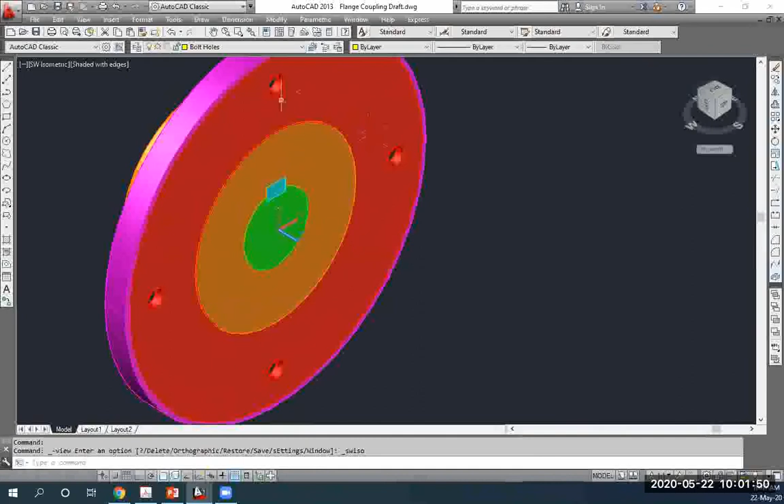First things first, just recapping. So the last thing I said was regarding the bolt PCD, which means the bolt pitch circle diameter. If I refer to my drawing again, a pitch circle diameter would mean if I draw a circle, the circumference of that circle should pass through all the 4 centers of these bolt holes you see here. So that's the pitch circle diameter.

Now that is based on your estimation. So now you have completed all the analysis, you know the dimensions for the key, you know the dimensions for the hub, and you also know the dimensions of the web, in terms of the web thickness, how thick or thin it is. But in terms of its diameter, that is based on your estimation.

Are you getting me when I say the web diameter? What would be the web inside diameter? The web is whatever you are able to see in red. Maybe I'll just turn off the others. So looking at it, the inside diameter of this web here is equal to the outside diameter of the hub. And now for the outside diameter of the web, that is entirely up to you.

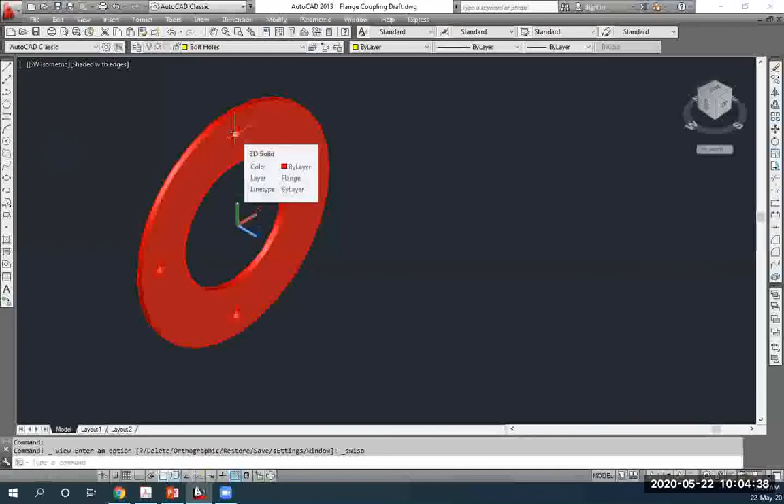Now PCD would mean the diameter of - if I measure the length across from one end to the other end, which is basically the PCD. When I say one end, it means the one end of the bolt center to the other opposite end of the bolt center. That would be obviously the PCD. So that's the pitch circle diameter.

So you can choose any value less than the outside web diameter. I hope that wasn't too confusing. So that's what you will do first - determine the PCD for bolts. So in this case, what you guys are determining is the number of bolts used in this case.

After that, the formula is the same. Everywhere in all our analysis, we are using torque, starting off with the torque. So torque is equal to - this time it uses shear force. So you have a flange coupling, you have two of these and they are held in place together with bolts. One side is connected to the motor, the other side is connected to the gearbox.

So what happens is, as soon as the system starts to operate, because both of the flanges are held with bolts, if your design is not proper, the bolts would shear off or break off. So that's why shear force is used in this case.

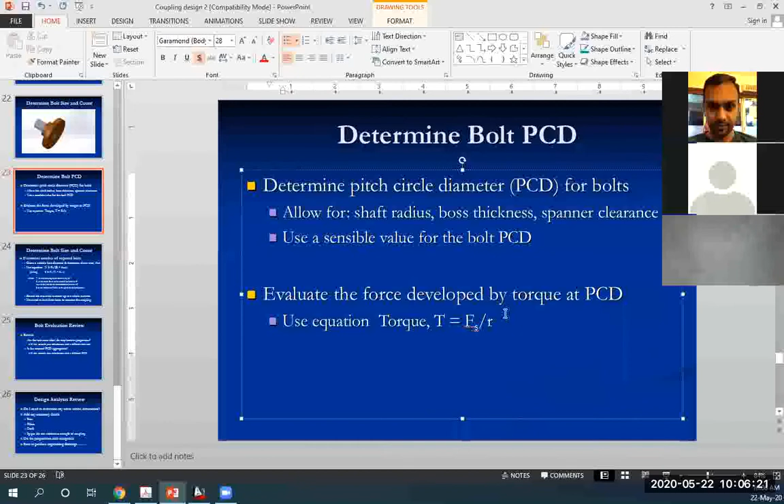So therefore torque is equal to Fs divided by R. Now what would be R in this case? Any guesses? The PCD radius. Exactly, it will be essentially half of the PCD. So now you make the shear force subject of the formula. You know the value for the torque, and you know the PCD you have chosen, specifically to all your assignment problems.

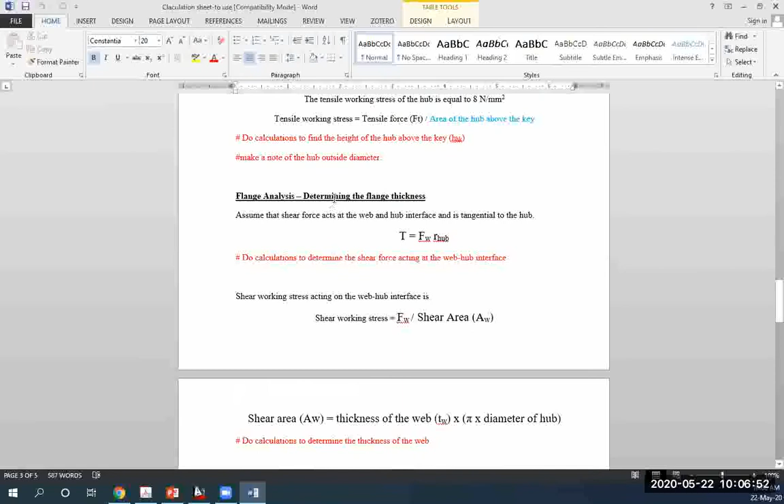So find the shear force. After you find the shear force, I'm not noting anything down here because on the calculation sheet, everything is pretty much similar to the other analysis. Maybe I'll just control C. Bolt analysis.

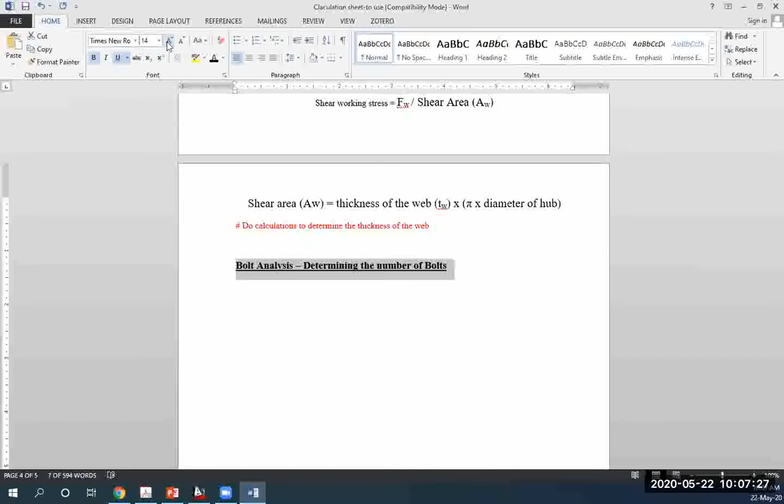Okay, so this is the next step which you guys will be doing, and this is what we are going over at the moment. So now what happens, it says determine the number of required bolts.

Okay, so your formula is still the same. This is the TS, the bolt working shear stress. Okay, and in this case, it's given in Newton per meter squared.

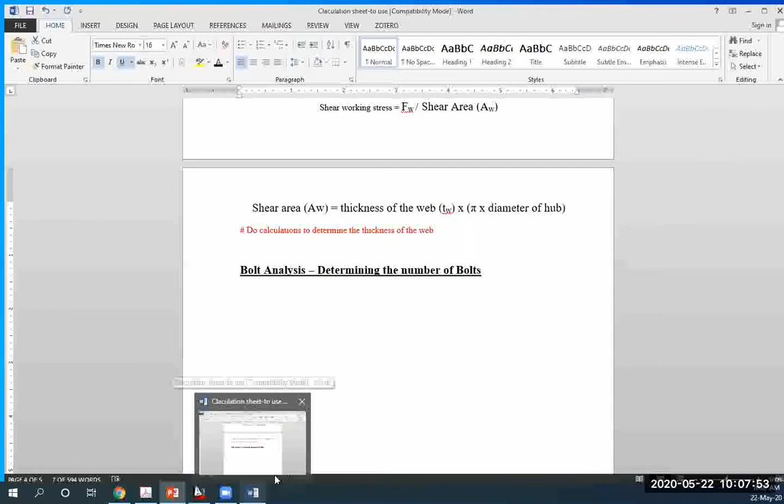So there was a question on one of the discussion forums about the dimensions. So be consistent with the dimensions, right? So here we have listed down all the details regarding the bolts.

So since we said the bolt would shear off if not designed properly, you could use the shear working stress value, whatever value is given here. And I did tell you in the very first class how do you find these two values. If you're unsure, please refer to the videos.

Okay, so you'll use the shear working stress value, input it in here. And you know, just from your previous calculation, you know the shear force. B here means the number of bolts in the pitch circle bolt pattern.

Multiply by area of bolt. AB is the area of the bolt. How would you find the cross-section area of a bolt? Or how would you find a bolt is a cylindrical object, assuming for simplicity's sake? So for a cylindrical object, how would you be able to find the cross-section area?

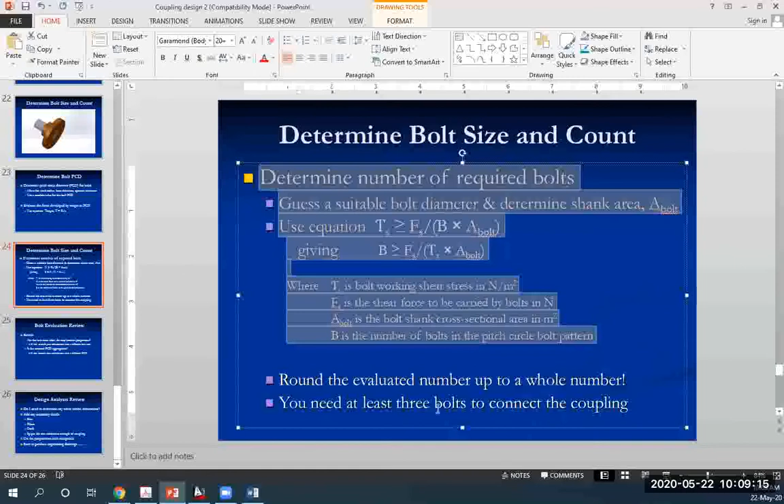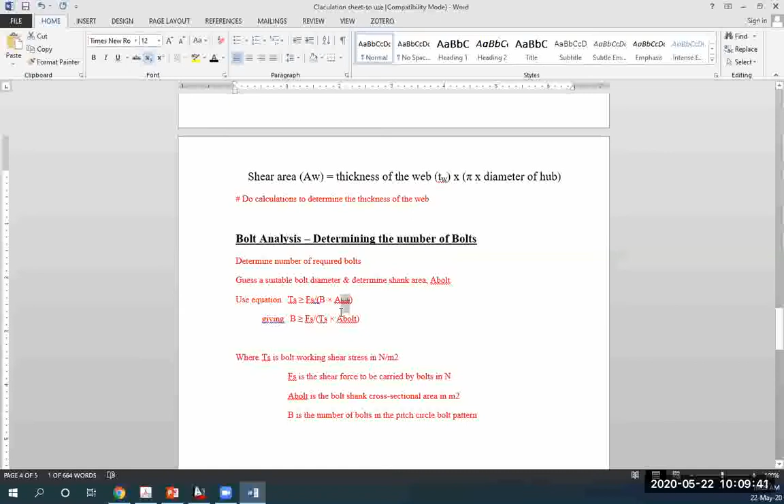Yes, anyone? Any suggestions? So is it area is equal to 2 pi r height plus 2 pi r squared? Plus, um...

Not really. Okay. So if you... Control C. Sandeep, yes.

The cross section of the cylinder would obviously show a circle. So would you use pi r squared? No. Yep, exactly, right? Yes, that's very much correct. Right. So cross section of a cylinder, A represents a circle.

So you find the area of a circle. Area of a circle is equal to, sorry, the symbol is pi r squared, isn't it? Yeah.

Now this r here, what do you think this r would be? What does it represent? This r would mean what? It is equal to the radius of the bolt, right?

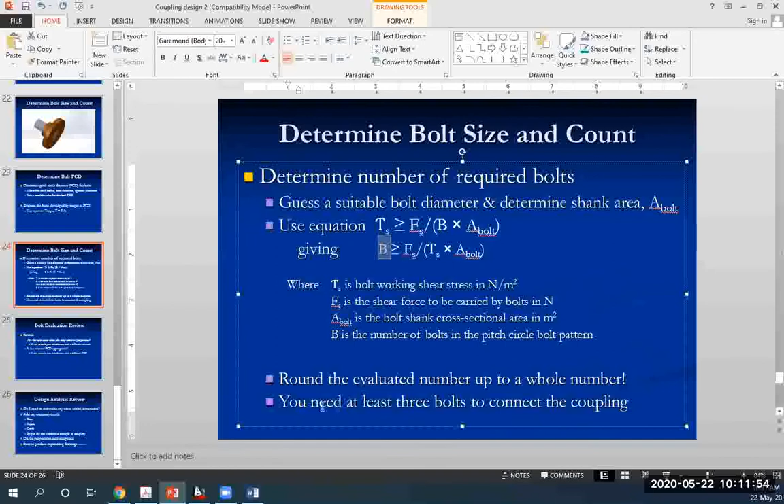And then it says here to review. So you know that area is equal to pi r squared. That r in that area is equal to the radius of the bolt, that you'll have to assume. So if you get a value for B which doesn't look okay, you'll have to go back again and change the value of the radius of the bolt and then do your calculation once more.

So what happens going from this equation to the one below it, you're making the number of bolt the subject of the formula. The shear force you know from your previous equation divided by the shear working stress for the bolt you are given in your assignment question, multiply by the area of the bolt. Area is pi multiply by r squared, R is the radius of the bolt.

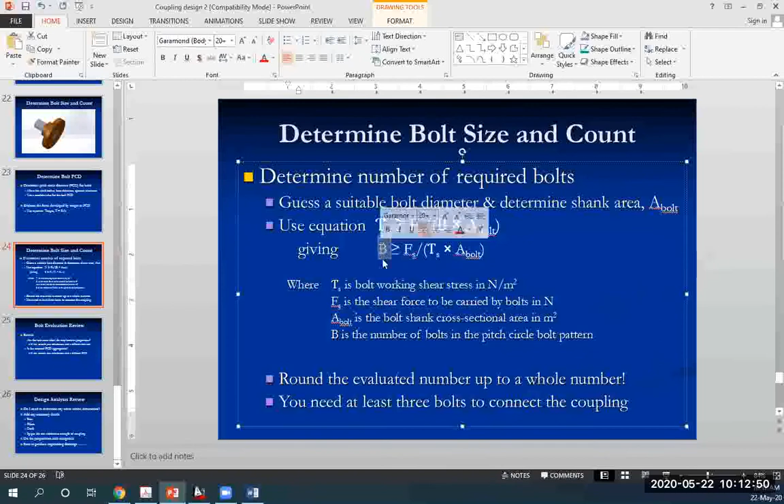So the only variable for you to solve will be B, number of bolts. Okay, so just by looking at this drawing, pretty much in my case, I have assumed 4 bolts. So the value for B is equal to 4, right? So if I get a number, if I do my calculations and I get a value for B as 3.4, I'll obviously round it up to the next whole number. So in my case, it's 4.

So now, is that good enough? Was that easy for you to understand? So I've just pretty much copied everything from the notes and written it down here, so making your work easier, just determine the number of bolts.

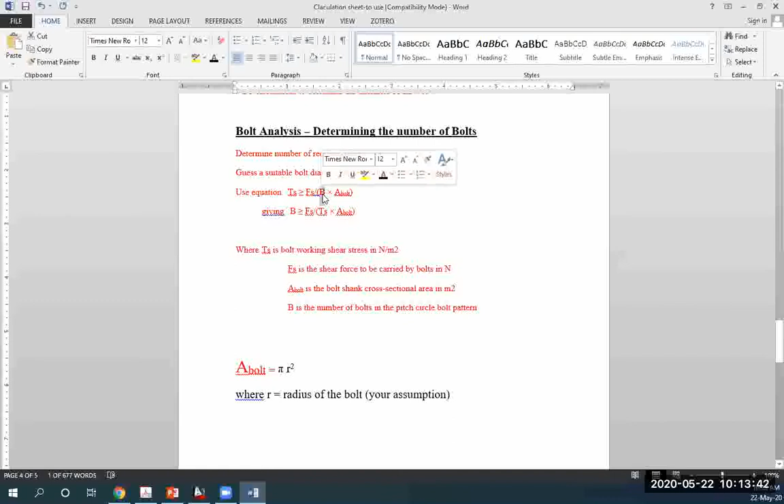Okay, you could also work your way the other way in the terms that you know B, which is the number of bolts. Let's say you use B as 4, and then you make R the subject of the formula. Then you find the radius of the bolt. In other words, you're determining the size of the bolt. Any questions?

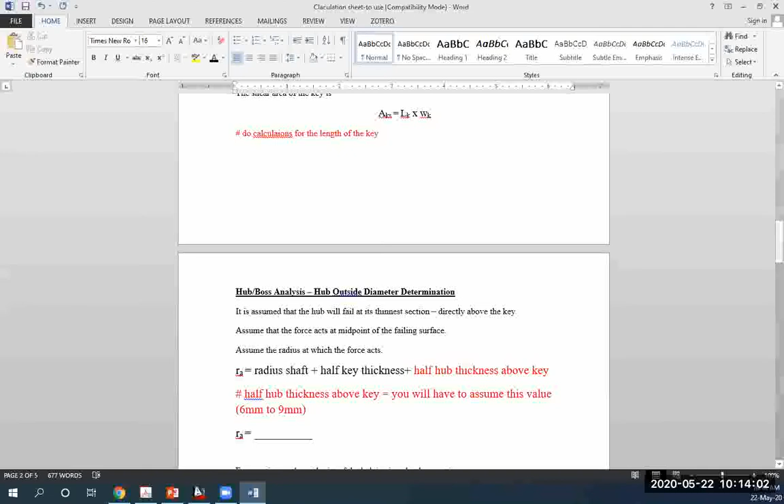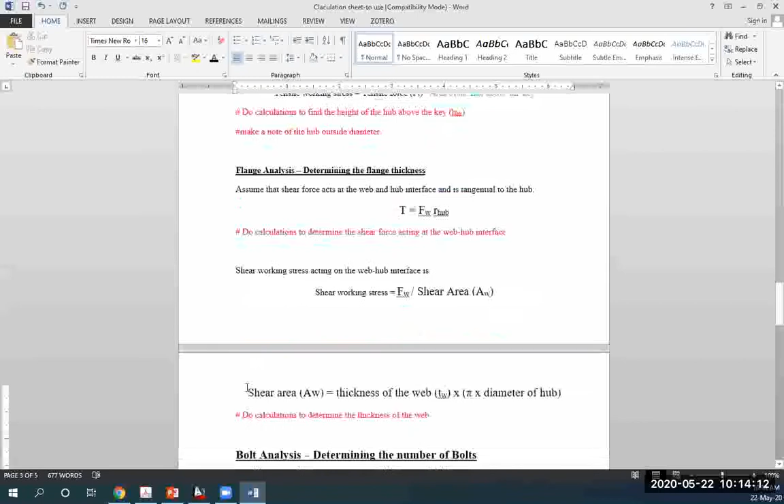Is there any limitation to the number of bolts, or is it based on your calculation? You mean the value for B? Yeah, is there any limitation, like in standard form?

Not really, but it should be something which looks practical, right? So if you have one bolt, that's not practical. Even two bolts would put a lot of stress on the bolt, keeping in mind how fast the shafts are rotating and subsequently how fast this whole flange coupling will rotate. So 3 is okay, 4 is also okay, 5 would also be okay.

But you don't just write that B is equal to 4, you have to show your calculations. How did you get to 4? It's just very basic calculations, nothing hard. There are only 2 places for the bolt analysis where you are making assumptions. The first is determining the PCD.

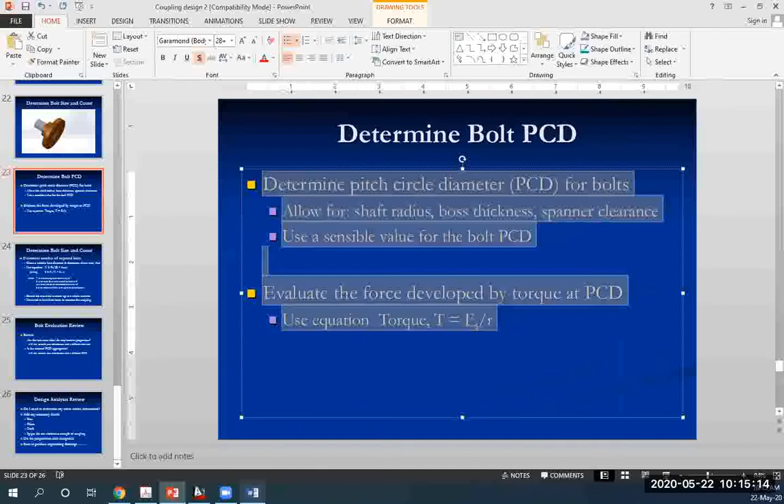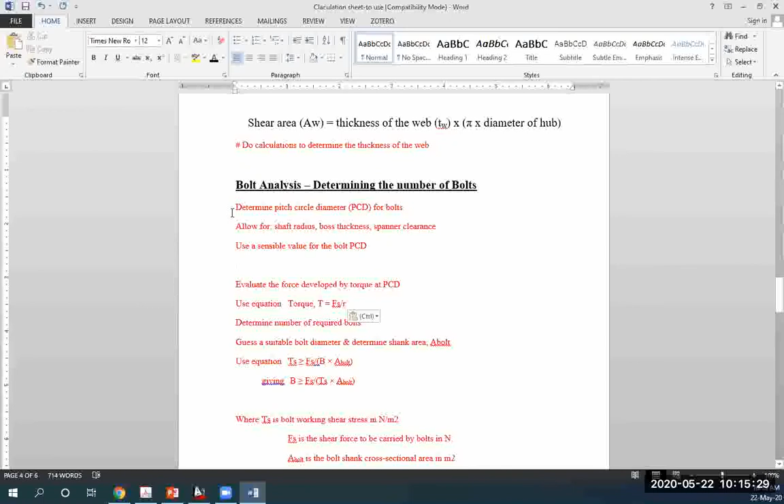I should probably put this down here, so that none of you guys get confused. All right, there you go. And whenever I put a hashtag, that means that is what you're required to do, in terms of calculations.

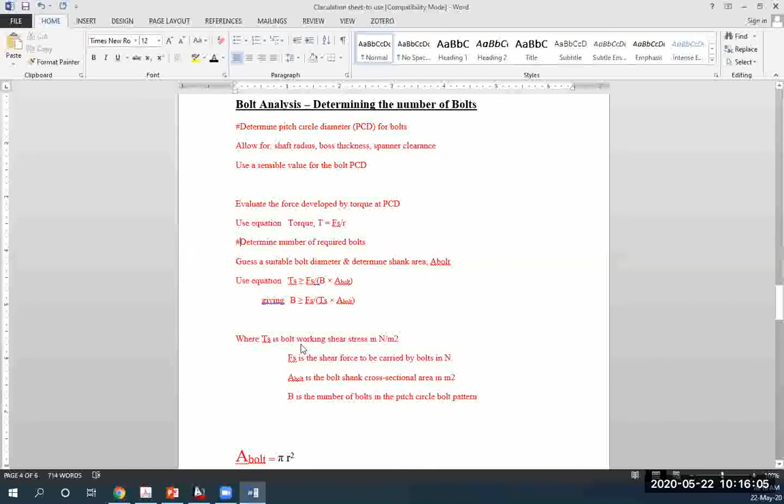Who was that who asked me the question? Was it me? No, let's see, am I able to get your name? Was it Joel? Yes, okay. So does that answer your question? Yeah, okay, thank you. So there are 15, excluding me, there are 14 of you.

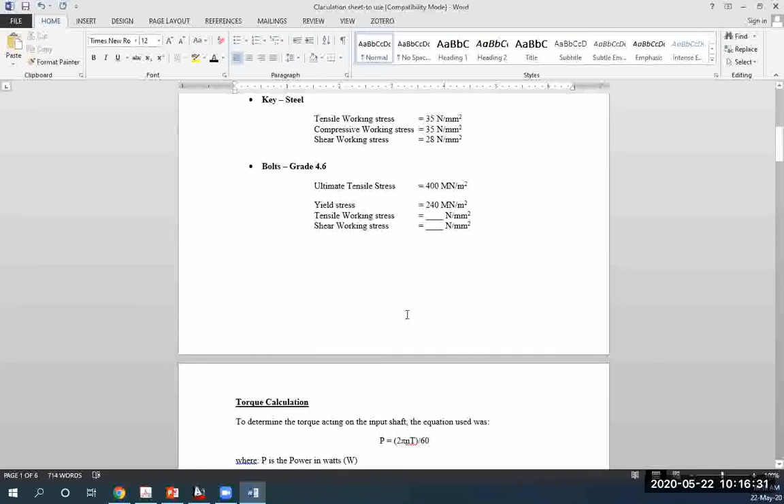Okay, so start from the beginning. I'll give you time before I discuss about what drawings you need to do. I hope you have started with your calculations. So if you have any questions, now is the time to ask. I'll give you the freedom to do that.

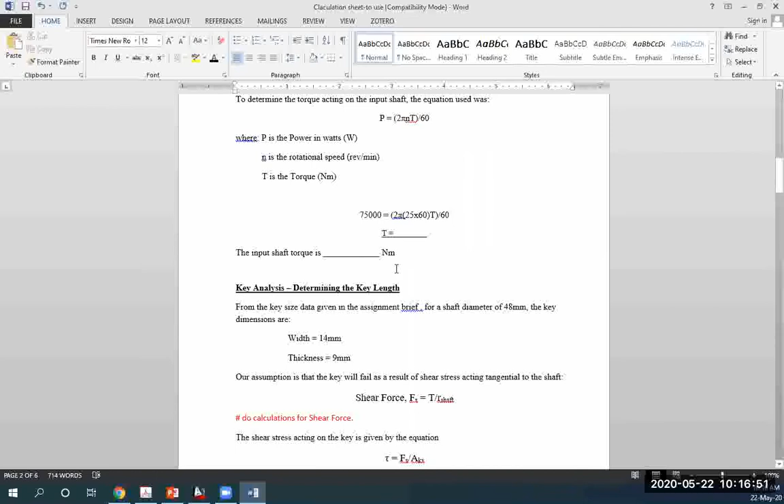So you do have the freedom to do that. We are not able to see any one of you. Feel free to unmute yourself and ask questions. This is the best time. If I'm not able to clarify, then obviously your other colleagues who are online would be able to provide you suggestions. So now you guys have the mic to speak.

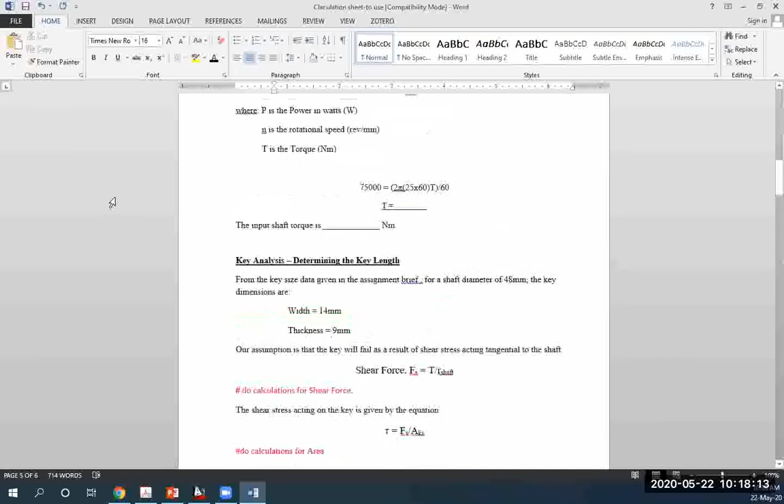So I'm not getting any questions from you guys, so my assumption is that all of you are on point with the calculations. Anyways, I'll just go over this once more. There are 2 parts to your assignment. The first part is design analysis, and the second part is drawing generation. You cannot go to part 2 without completing the analysis.

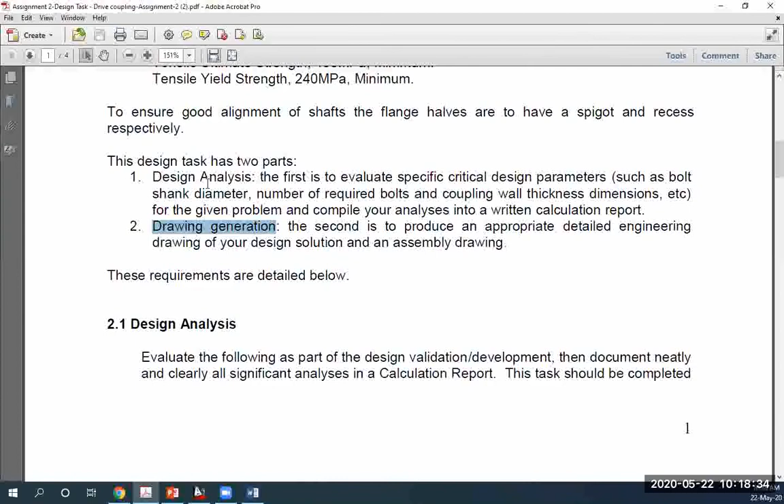The reason you need that is because through the analysis you would be able to—oh, there's a chat. Sir, could you go over the bolt analysis again? My Zoom wasn't able to connect. Okay, right, so once I finish, at the end I'll go over the bolt analysis again. So you can't do drawings without knowing the dimensions. That is important.

So let's see. When it comes to the design analysis, you are given a calculation sheet which has a standard view. It has the project title, the authors. I believe you're doing this in pairs, so write your name with your ID and your partner's ID and name. The date which you probably started with the assignment, not really important, and if you can include somewhere who is your tutor or teaching assistant.

So we are aware which session you belong to, but not really important at this stage. And the page—in my case I've used 4 pages, so this will be page 1 of 4, and the next one will be page 2 of 4.

So start with the overview. Again, this has to be in your own words. Overview is basically a summary of your entire calculation report. So if someone else picks up your report, he or she should be able to understand straight away what this report contains, what information is provided, and what information the author is trying to determine. Okay, so we are doing analysis, calculations together with assumptions for a flange, to design a flange coupling.

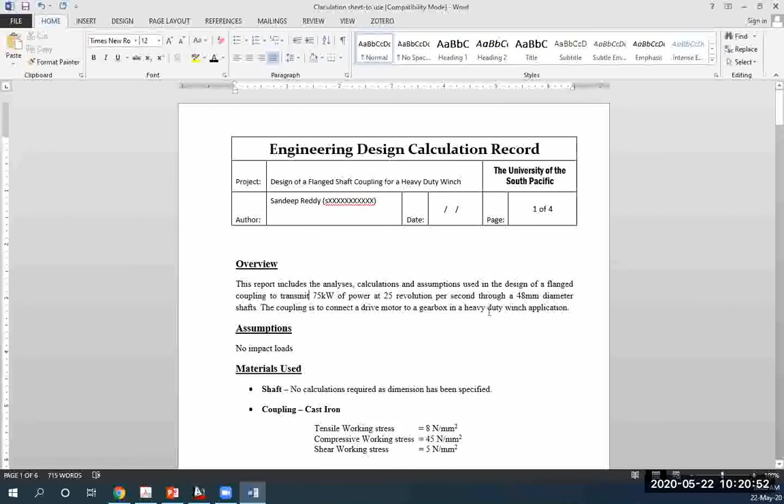And what is the purpose? The purpose is to transfer or transmit power from one shaft which is connected. You could make this more precise—I haven't said here that the power is transmitted from the motor to the gearbox. You could add this here as well, and the coupling is to connect it. Anyways, it says here a drive motor to a gearbox, so please go ahead and write this in your own words. Not hard at all.

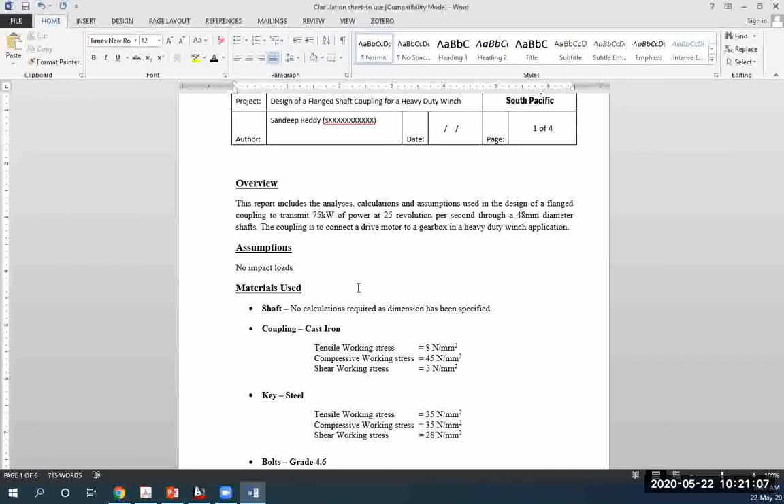Assumption: we are assuming that there are no impact loads. The only load acting on the system is due to the torque which is generated, which we'll come to later on. Materials used—really important. Just like in any textbook, you list down the knowns first, so that is what we are doing here. For the shaft, we are saying that there are no calculations required.

Okay, moving ahead, you could pretty much keep this the same. It will be pretty much the same for all of your reports.

Okay, for the coupling, it's made out of cast iron. So what is the tensile working stress?

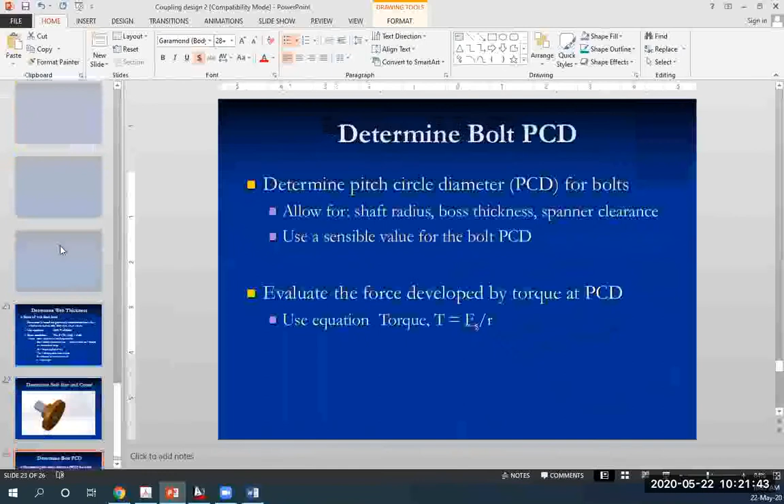Anyways, going back to your report, so you list down all the knowns. For the coupling, it's made out of cast iron. For the key, it wasn't specified, so please do note this, that the key is made out of steel. And for steel, you also have to note down its tensile, compressive, and shear stress. Why are we noting this down? Because we are using this later in our calculations.

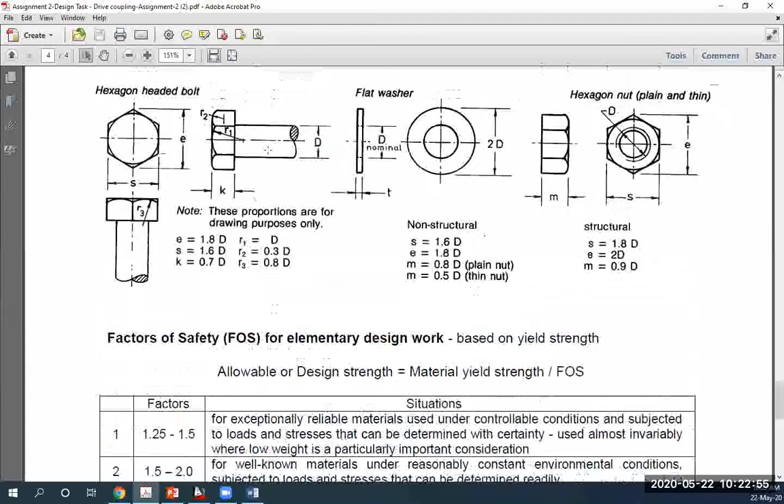And coming to the units, be consistent with your units, right? So it's 8, I have used, it says in your assignment, where is it? Here. So either you can use working stress in meganewton per meter squared or Newton per millimeter squared. So for cast iron, it's 8, so it's either 8 meganewton per meter squared. So you can always be consistent with your units, right?

And yes, all of you have learned to use SI units, so if you want, you could use that all the time.

So just a question, yeah, carry on. So will we be using the ultimate tensile stress and the yield stress of the bolts, which is given here in the analysis? No. No. Okay, no.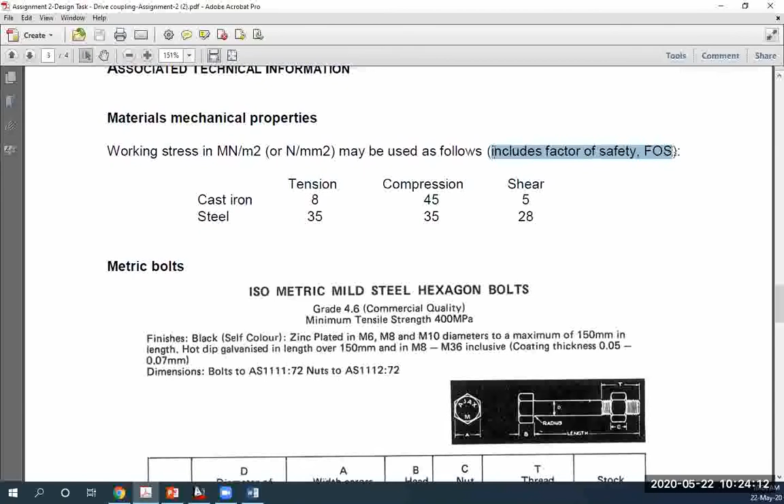The reason you will be not using it is because you would have noticed that in all our calculations we are using the working stresses. Reason being, because it says here, yes, because it includes the factor of safety, right? So meaning all the calculations which you are doing, and at the end, the values you will get, which you will use for your design in drawings, will include the factor of safety. So your factor of safety would be pretty much greater than 1 in this case. Okay, so you would say your design is safe, right?

Okay, and what else is there? So I've just made changes to this one. See, but don't be too confused about the units, so it ultimately determines the values you get, right?

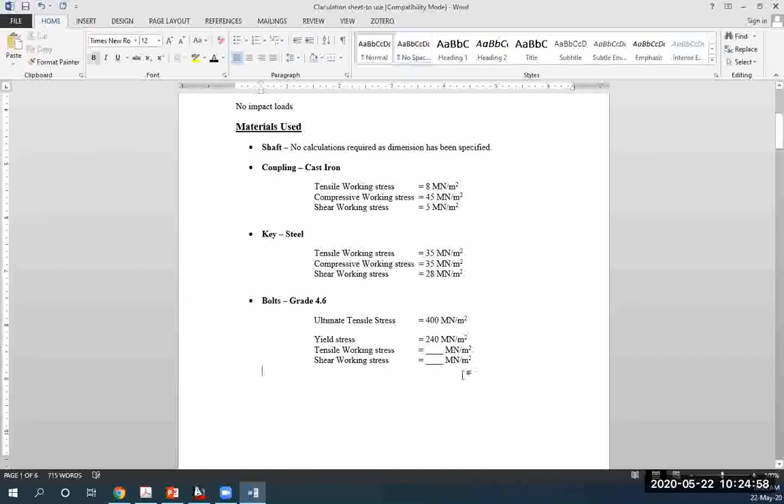So here we are, so after getting all that, it starts with the torque calculation. As for the torque calculation, you're given the power, this formula is provided to you in this PowerPoint slide: 2 pi nt over 60. So this is where the units come into play, right? Power, you convert it into its standard units, which is watts. So convert kilowatts into watts.

And I believe the rotational speed was given in revolutions per second, so convert it to revolutions per minute. And then once you use SI units, automatically the value for torque you will get will be given in Newton meters, right?

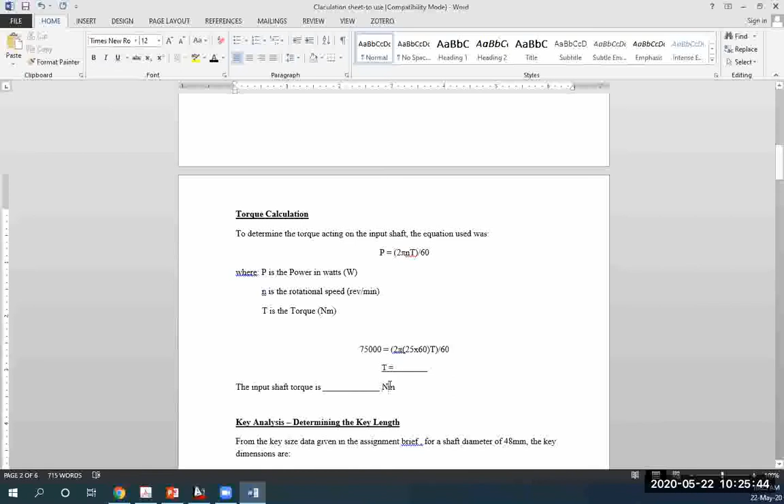So there you go, and after that, you start with the key analysis. So for the key analysis, you're given the width and the thickness. When I say given, it is given in the last page. So using the shaft diameter, we were able to determine the width and the thickness of the key, so you use that in your calculations. So the only thing you need to determine is the length of the key.

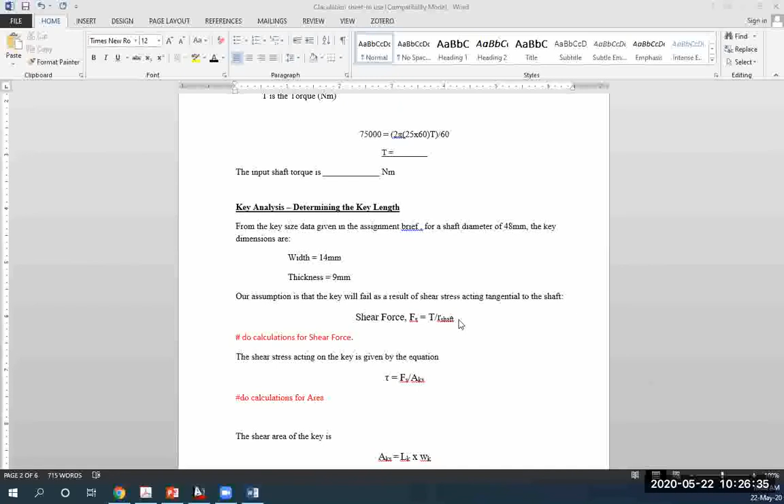So we assume that the key will fail in shear. So for torque, you are aware, and you use the radius of the shaft. So always torque is equal to force times distance. Distance means from the center to wherever that force is acting, to the point where that force is acting. So that's how we determine what R is for all our analysis.

And so the key is experiencing shear stress, so stress is equal to force over area. So the area part of the equation, you break it down into the length of the key, width of the key, and then you find the length of the key.

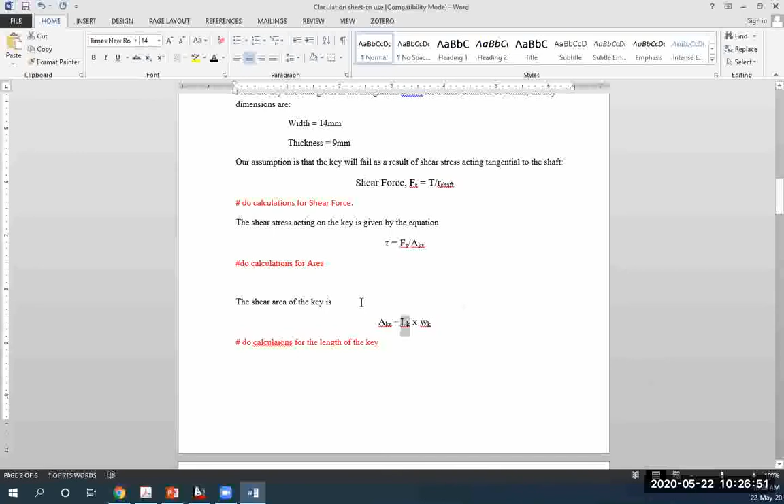Once that is done, we did the hub, okay, we'll call it the hub analysis, so not to confuse anyone. And similarly, for the hub, you have to determine at which point the hub breaks. That's why we did RA.

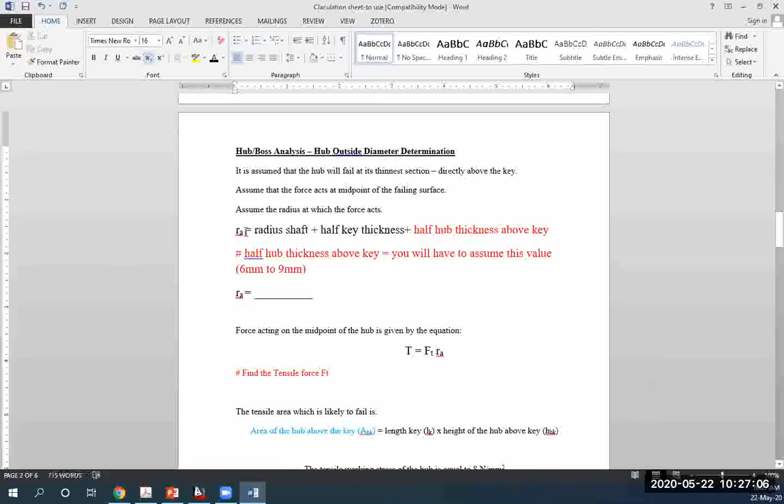RA means assumed radius, which is the radius of the shaft plus half the key thickness plus half of the hub thickness. This part I said you could assume anything between 6 mm to 9 mm. So that's your assumed radius.

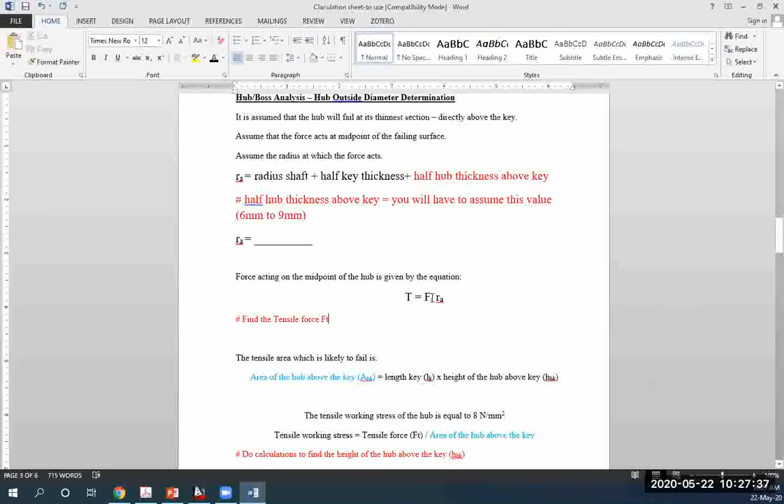So once again, torque comes into play. We are assuming that the hub will fail due to tensile force. That's why Ft. Use this equation to find Ft, the tensile force.

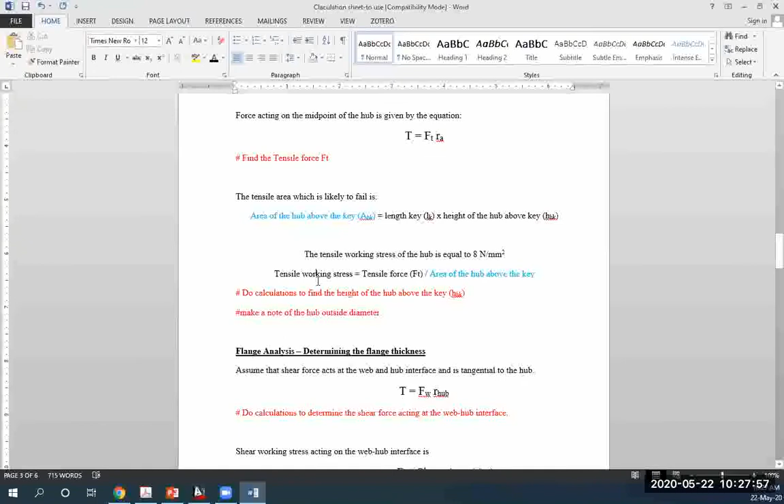So now the tensile working stress is equal to the tensile force divided by the area. Just in terms of units, to simplify things for you, let's say the tensile working stress I used is 8 meganewtons per meter squared. That's my units, assuming. So I'll input here 8 meganewtons per meter squared.

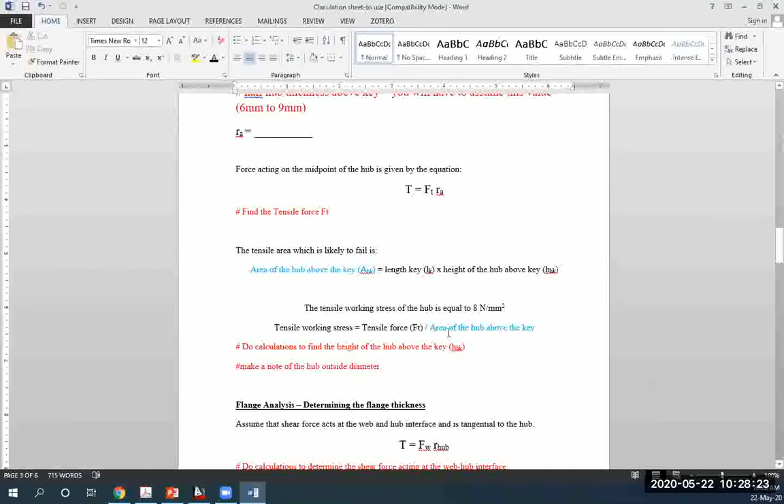So the tensile force will be given here in newtons, divided by the area. Now it is meganewtons per meter squared. Therefore, this area part, the values here which you use should also be in meters.

Let's say, for example, for the tensile working stress, you use 8 newtons per millimeter squared. So the tensile force will be in newtons, and the area part, the units would be millimeters. So that's about units, okay, how units affect your answer.

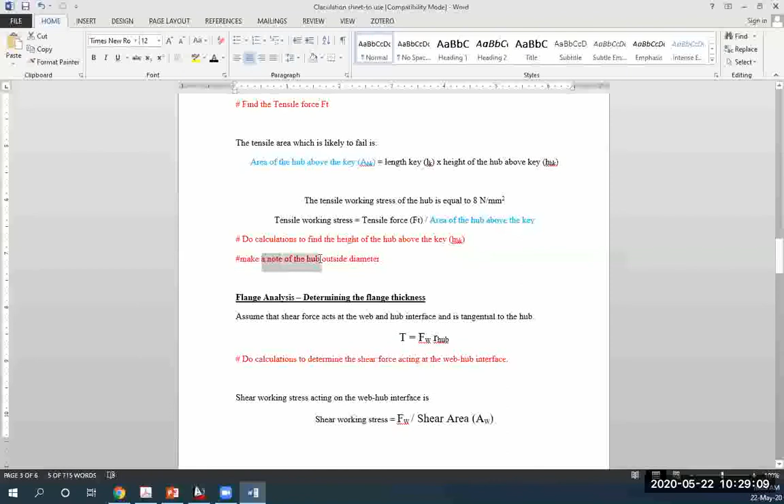So here, do calculations to find the height of the hub above the key. And make sure after you find that, add everything together and tell us what is the outside diameter of the hub. After that was the flange analysis.

I would probably put here web analysis. No, flange analysis, determining the web thickness. How thick is the web?

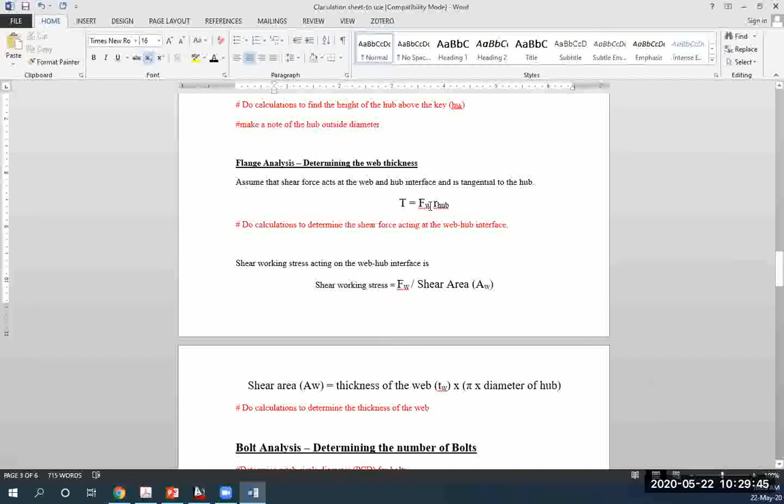So again, torque. We are assuming that the web will fail in shear. So wherever the flange interacts with the hub, that radius we are taking as the radius of the hub, right? The radius will always take it from the center of the shaft. The starting point is the center of the shaft. Do keep that in mind.

So you find Fw, which is the force acting on the web. Okay, we have limited time. What else is left? So again, shear working stress, which is acting on the web, and the web is made out of cast iron.

So the shear working stress here is 5 meganewtons per meter squared. Shear working stress is in meganewtons, so the force should also be in meganewtons, divided by the shear area, and area should be expressed accordingly. So when you have units which are consistent, you'll see that they cancel each other out.

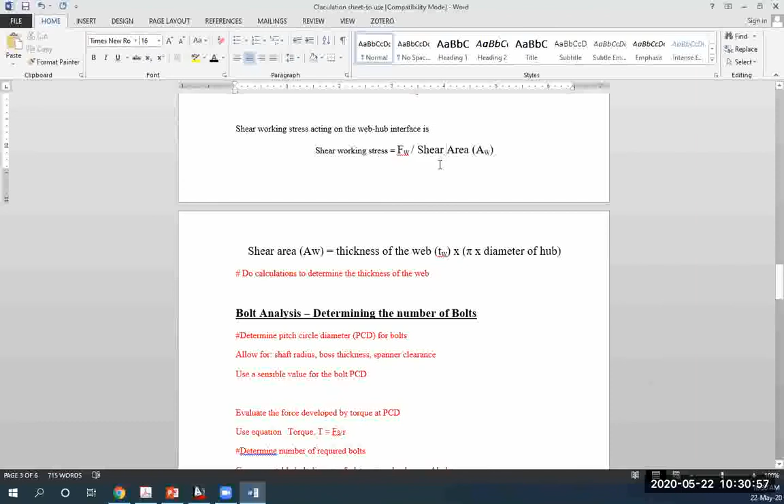So shear working stress, let's say you have expressed it in meganewtons per meter squared. So your FW has to be in meganewtons divided by meter squared. After that, the shear area is equal to as such, so the only variable left for you to determine is the thickness of the web, which is here, TW.

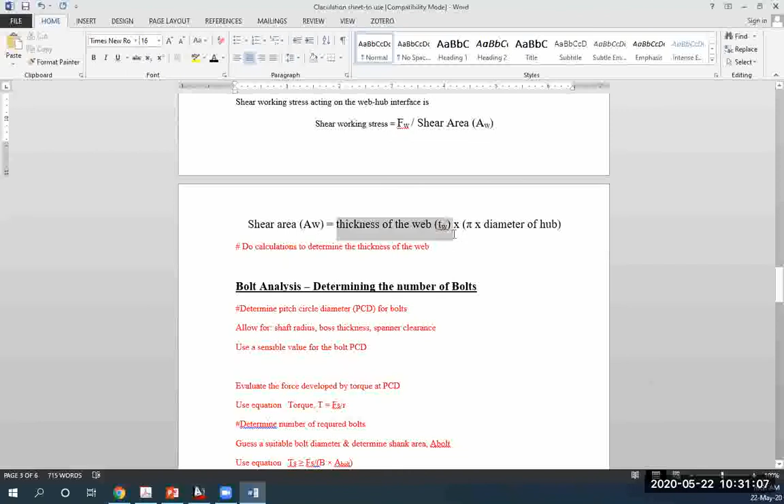And coming to the bolt analysis, you could work either way. Either you could determine the number of bolts, or you could determine the size of the bolt. If you're determining the number of the bolt, start with the torque first.

So torque is equal to the shear force times R, where R is half the pitch circle diameter. In other words, the starting point for that R is the center of the shaft, and the end point is the center of the bolt. So that's half the PCD.

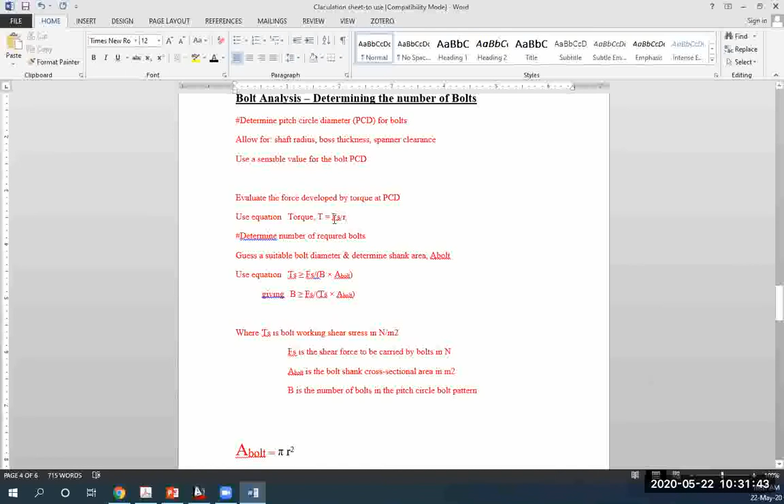So here you'll find the shear force acting on the bolt. Now TS is the shear stress acting on the bolt. So shear stress is equal to the shear force divided by the area. Always remember that stress is equal to force over area.

And in this case, what we are doing is we are multiplying the cross-section area of the bolt by the number of the bolt. So here it is where you can choose.

So if you know the number of bolts, you enter that value in place of B and find r, where r is the radius of the bolt. Or if you do know the radius of the bolt, then make B the subject of the formula, as is done here. So B is the subject of the formula.

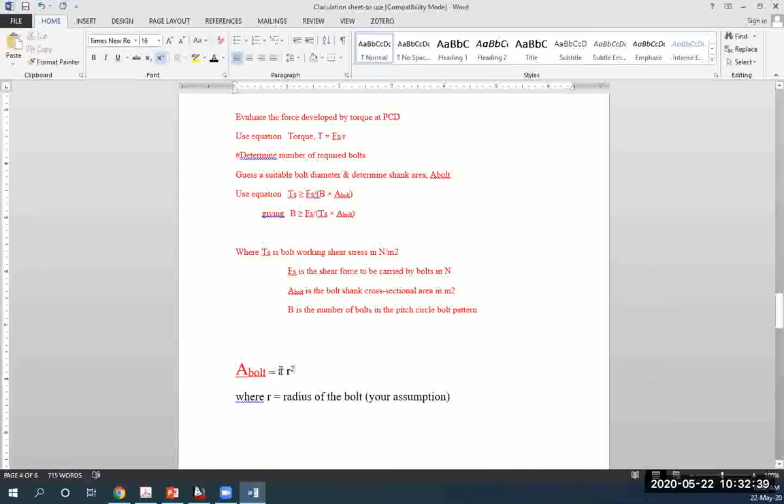Shear force, you know, TS is the shear stress acting on the bolt multiplied by the area of the bolt. And as I said, the area of the bolt is the cross section area, pi R squared, where R is the radius of each bolt. So that's your bolt analysis.

And so we will also be assuming the web outside diameter, which is 200 to 230 mm.

So in red in front of you is the web. The inside diameter of the web is equal to the hub diameter. The outside diameter of the web, you can assume any value between 200 to 230, 240, even 250 is fine. That will help you with your drawings.

Sandeep, one more question I would like to ask. Is there any interval for the radius of the bolt, or do we just choose it by ourselves?

When you choose the radius by yourself, you might have to repeat the calculations a number of times. The reason being, if you choose a value of R and at the end when you do calculations for B, you get a very big number, like B equals 10, you know, how can I fit 10 bolts in here? So then you'll have to go back and change the R value and do your calculations once more. You might have to keep changing the value of R, up or down, until you get a value for B which is reasonable or realistic.

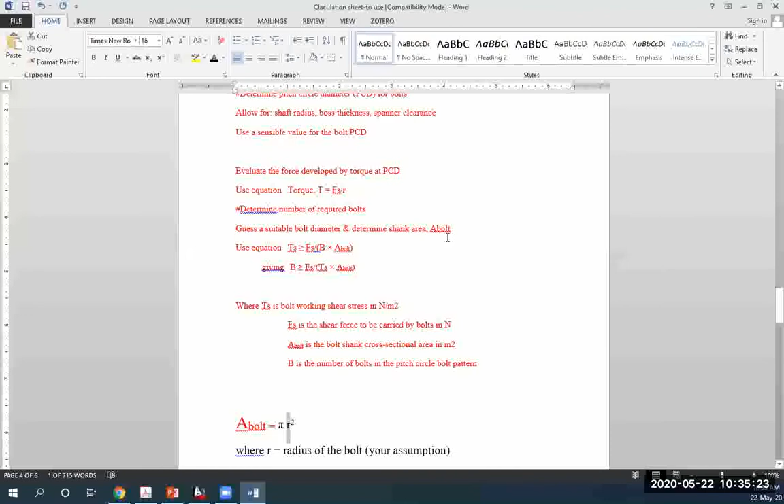So whatever suits you, Ibrahim, you can make B as 4 and then find R. In your analysis, instead of determining the number of bolts, you are determining the size of the bolt. Either way works. If you want to find the size of the bolt, make R the subject. If you want to find the number of bolts, make B the subject. Just do one, don't do both.

Keep the questions coming in. Let's see, Prashant, are you still here? Does this answer it? I went over the bolt analysis again, are you okay with this?

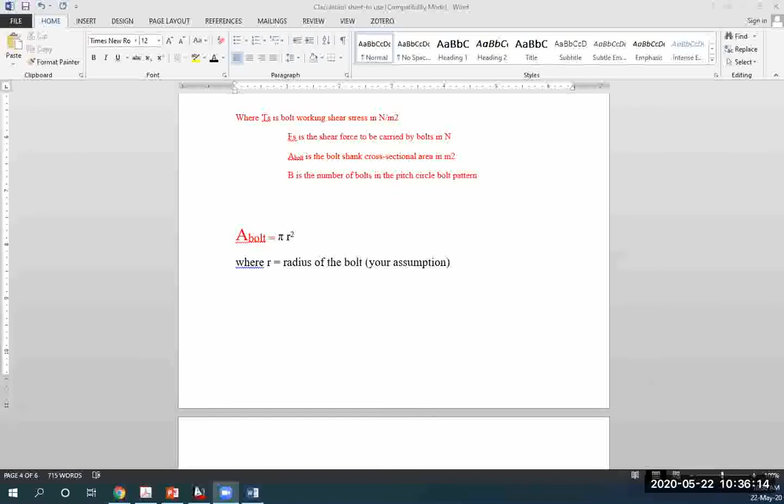Prashant is sending messages, yes. Okay, that's good. In case this session ends, don't worry, I'll restart it so we can go over the drawings. When does it end? Oh, we have 3 minutes remaining. That should be enough for me to cover the drawing.

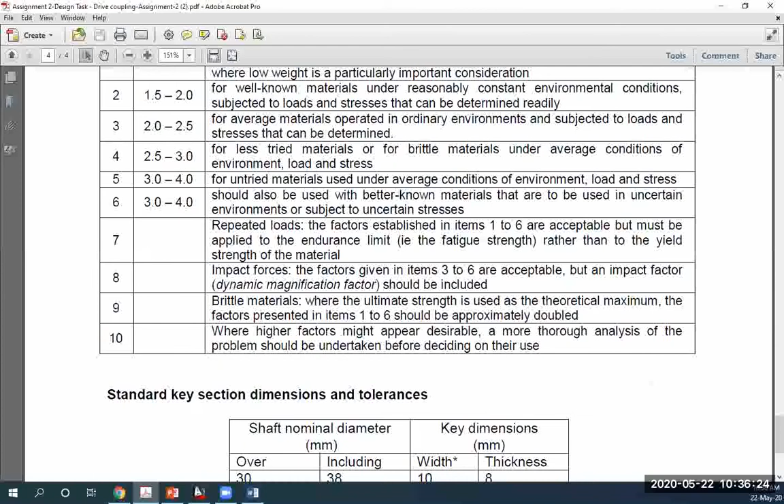Sandeep, one more question: the calculation sheet requirement is up till 3 to 4 sheets of calculation, what if it exceeds? Exceeds, no problem at all. No worries, as long as you're able to capture all the information.

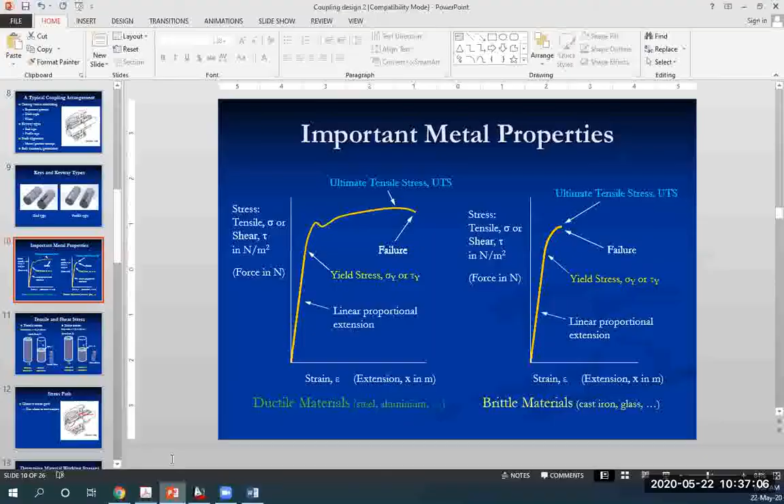Got it. Okay, now coming to the second part, which is the drawing generation. Now you have done all the analysis, you know the dimensions of the key, the hub, and the web, so you'll start drawing. All of you are experts at AutoCAD by now, so things would be easy. You have to do a detailed drawing, as well as detail engineering drawing of your design, and an assembly drawing.

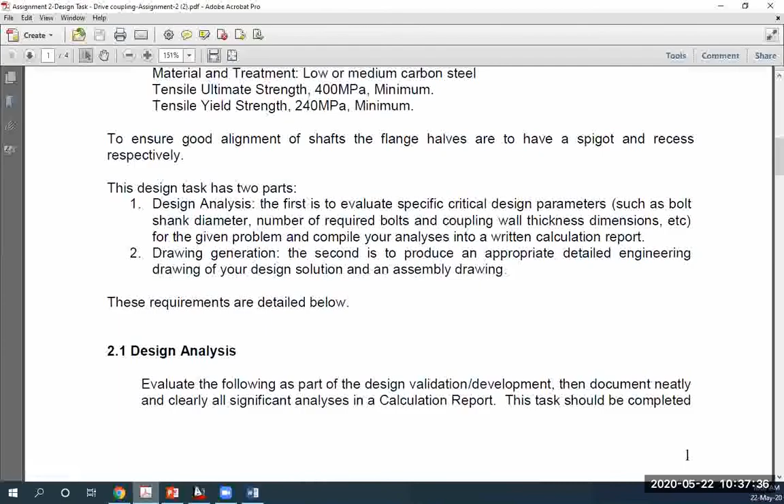In a detailed drawing, detail means giving detail to your drawing. Make sure in detailed drawings you could have, I don't know, 2 pages of drawing. So we'll start off with the shaft.

I haven't put the dimensions on it because that will give you the answer straight away. So this is what the shaft would look like. Give the diameter of the shaft, it's 48. As for how much you will extrude, that is entirely up to you, but make sure you extrude the shaft greater than the length of the key, so it looks something reasonable.

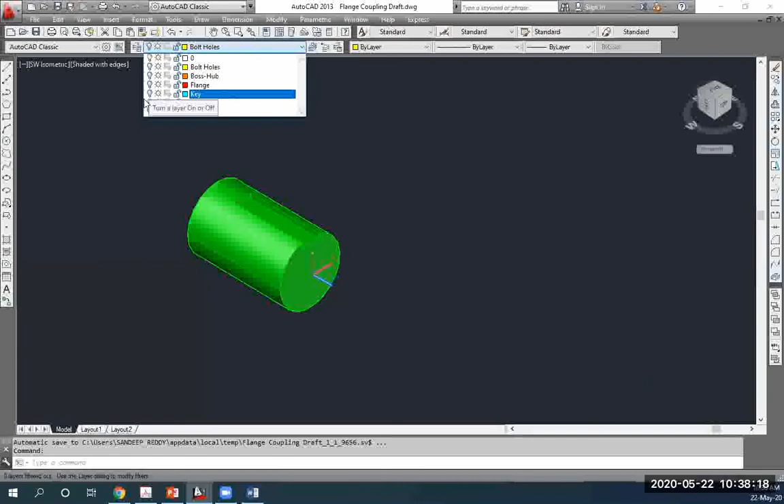Put the dimension on this, and then somewhere separate, draw what's after the shaft, the hub. I've drawn it above it, so you can always separate this. Dimension the inside diameter of the hub and the outside diameter of the hub. How do you get the dimensions? That comes from the calculations. I forgot one thing, the key — now the key is also there.

There you go, that's the key. Dimension the key as well - the length, width, and thickness. Okay, that's done for the key. What's next?

Okay, then you have the flange - oh sorry, the web. Okay, then you dimension the web. What's the inside diameter? What's the outside diameter?

So one thing I've missed out in my drawings - also dimension the bolt holes. You also have to show the bolts. You don't have to really show the threading on it, just show a simple cylinder with a nut head. That's all, that will be the bolt. Not the nut head, but the bolt head. Just show a simple cylinder which should be able to fit inside the bolt hole snugly, and show the bolt head. That's all, it could be a hexagonal bolt head.

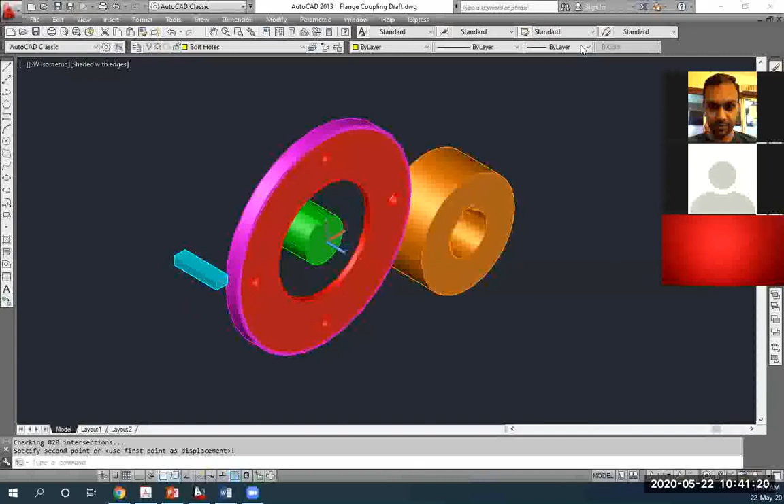Okay, so that meeting ended, and back again. So we were discussing drawings, right? Okay, so fire away - ask as much questions as possible to clarify any doubts.

Sandeep: Yes, what's that purple part on top of the web? The purple part is actually - I just put it in a different color. That's just like the rim, okay? The purple part is just this outside part. So a bit of creativity there.

So let's see if I'm able to orbit and show you what I mean by that. It's also part of the web, right? No, not this. See, there you go, that's what it is, right? Yeah, I don't know why I made it in purple. Purple is fine, I know - if I put it in red it looks a bit hard to see, right? So I just put it in purple.

Right, so you guys have already learned about layers in CAD drawings, isn't it? So this week's lab is about layers - technical documentation. What I did was I used layers, so you can always give your layers names as well as different colors. So it's easy to visualize, rather than having everything in one color.

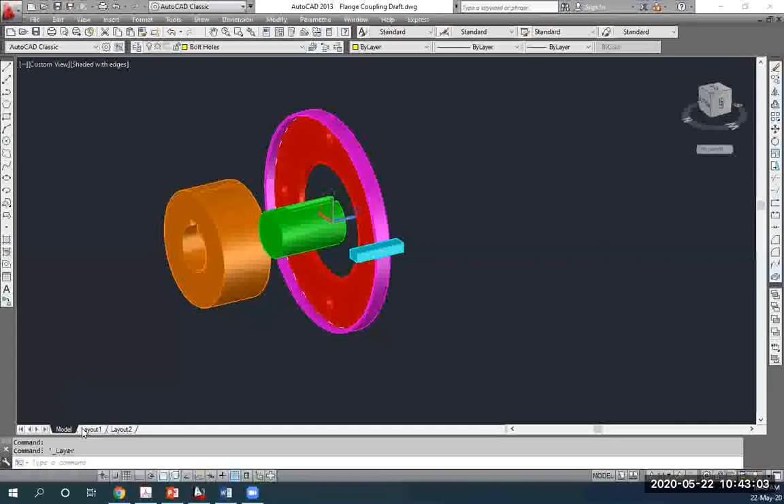Ibrahim: The submission part of this assembly drawing, will it be in layout form or just in this model space? Oh yes, now I would prefer - see, so in layout that is where you create your pages, isn't it? So have two layouts, right - one for your detailed drawing, and the other one for... Assembly drawing. Yes.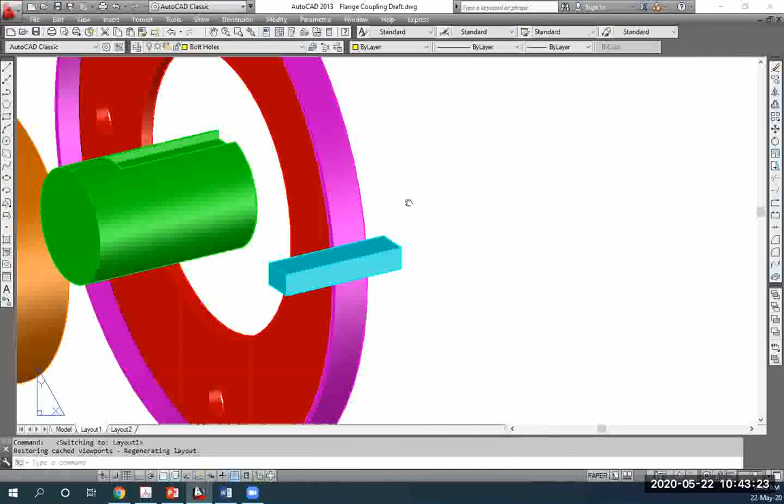So in one layout you could have all your - where is mine - yeah, you could have all your drawings. In other words, you'll have a total of 1, 2, 3, 4. So dimension them as much as you can, right? And the second layout, the second page I would say, have your assembly drawing. You know how to put them all together, right? So it should look like that - if we assemble the whole flange, it will look something like that.

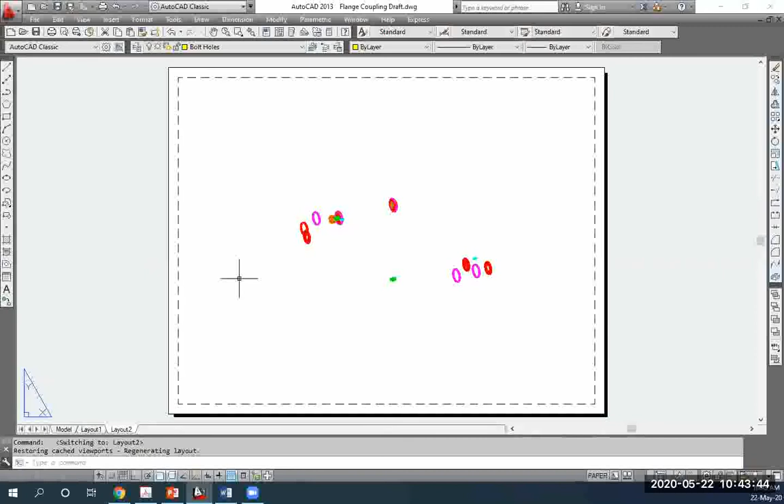So Ibrahim, does that answer your question? Yes sir, thanks. Okay great. Sandeep: Is the assembly drawing simply like somewhat called the exploded one? Exactly, assembly exploded, same thing - exploded view.

Any other questions? And yes, always see - I have made many, it's like my model screen is a mess, right? Make a habit of doing this, because obviously when you go to your layout screen you'll just be showing this, isn't it, with the paper's correct paper size, and the title block and everything. But your model screen can always be a mess, right?

So sir, just for clarification - the detailed drawing will be all the parts separated with their respective dimensions, and assembly will be the exploded view of that? Exactly, the assembly will be exploded view. So in assembly, try not to have those dimensions, okay?

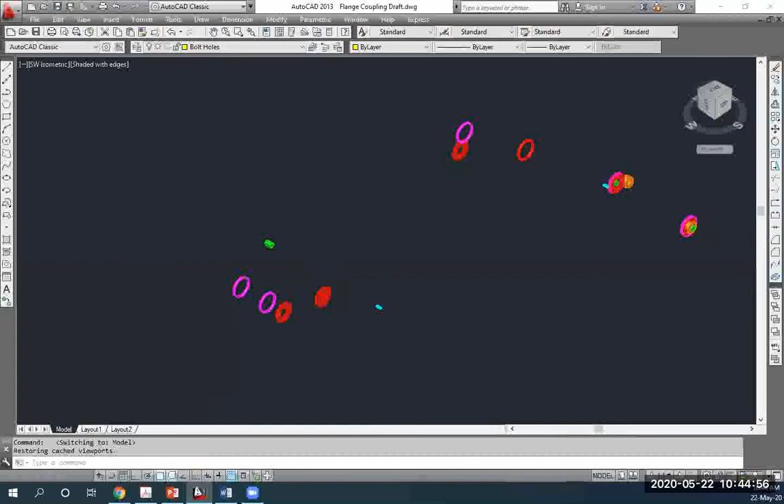Oh okay, or you can always make a copy, just like I have done - just make a copy of it. Put one as assembly, I mean exploded, the other one with all the dimensions on it, and just show it on the appropriate layouts. Sandeep: For our detailed drawing, will we have it in the multi-view form or the solid 3D form - like 2D or 3D?

If you're doing detail drawings, should it be shown in 2D or 3D format? Good question—since we'll also need dimensions, I'd prefer 2D for more detail. I saw a sample in a mechanical engineering topic where the detail drawing in the assembly drawing was done in 2D.

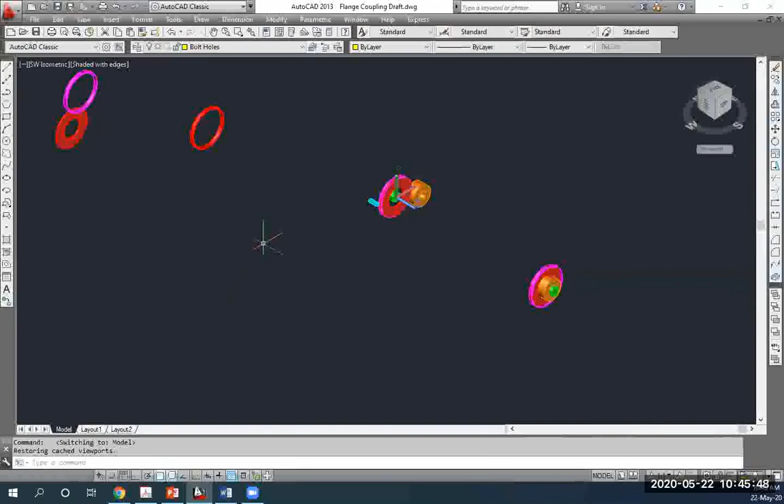But if you just take 3D, would you be able to dimension it properly? Wouldn't that be hard? Actually it won't be hard, because in this case the dimensions aren't very complex.

For example, if you look at the key, you just have to dimension the length, width, and height. Draw every part separately and show its dimensions on one page—in your layout. So if I go to layout 1, I should see each part with its respective dimensions in the correct format. So 3D is fine.

Okay, so that will keep things simple for you guys, right? Any other questions?

But if you want to go ahead and do orthographic views for your detailed drawing and put dimensions on it, you are very much welcome to. 3D with the dimensions giving the details would be fine as well.

And the second one is just the assembly drawing. Any other questions? One more from Sandeep—for the assembly drawing, that will be exploded, right?

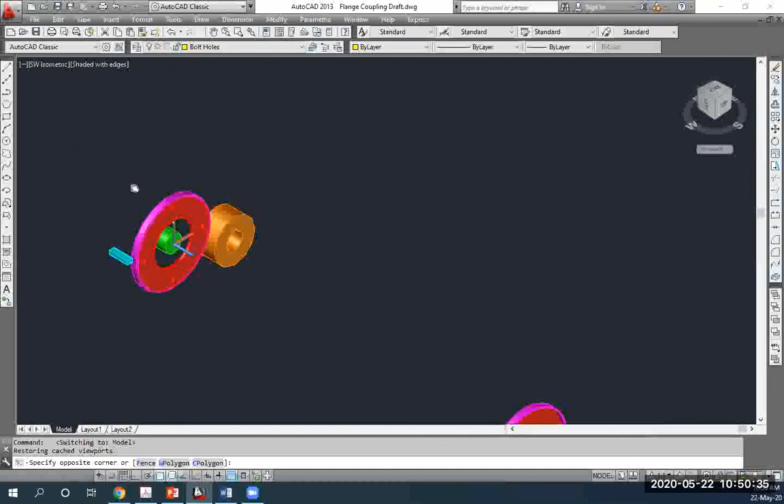So just coming back to the purple part which is attached on the web—is the thickness assumed for that? What I did was use the same thickness we calculated for the web, applying it to the purple part as well. It's like a rim. Oh okay, so that's the rim.

So it is part of the web, and its extrusion is also assumed. Yes, you can assume that extrusion—I had to assume it as well, but make it something that looks reasonable. But that purple part will be extruded more than the web itself, right? Yeah, it's like this.

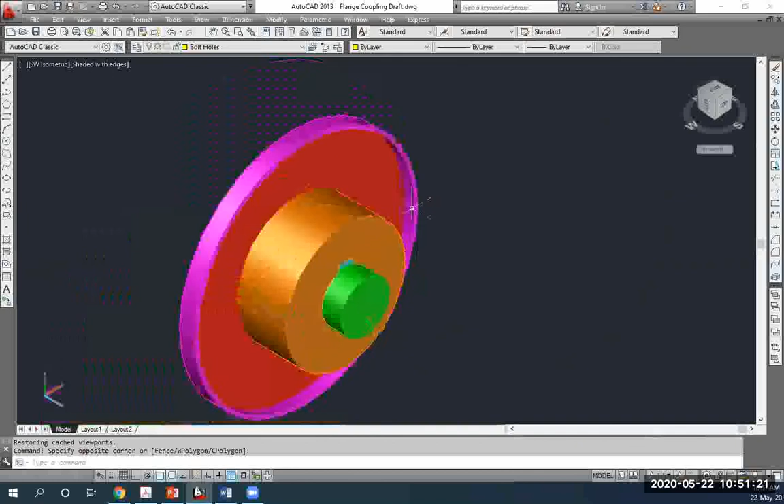Any other questions? Sandeep asks about the scale for the drawings. The instructor clarifies it does not specify a scale, so students have the freedom to choose their own.

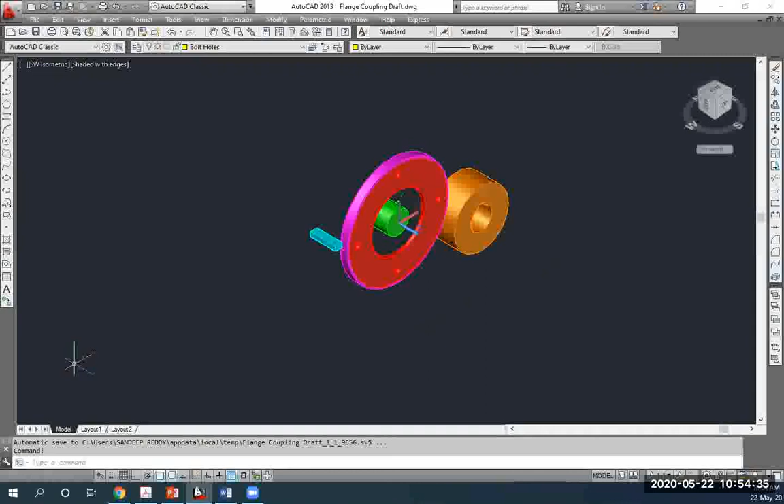The instructor explains: go to the model page and change the page setup, setting the scale to 1:1. Sandeep asks whether the same needs to be done on the layout page, since on the layout page there's a hidden line, and when you enlarge the black border, that hidden line still remains.

The instructor walks through it: let me try this. In the page setup manager, you choose a printer, then choose the paper size, such as A4, 297 by 210.

They confirm the scale to use here is 1:1, and that's all that's needed in the page setup.

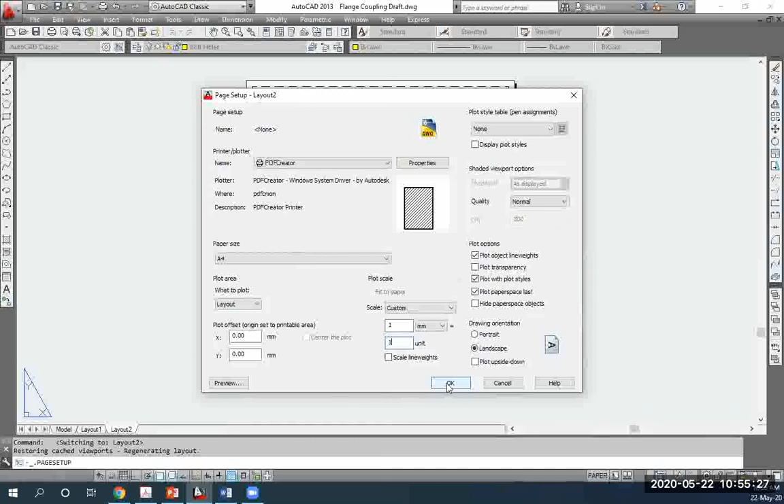Sandeep asks if this was done on the layout page. The instructor confirms: you don't do this on the model page, only the layout page, because the model is like a sketch or canvas, you don't need to set scale there. So just do it on the layout page, then proceed with the next part of the drawing.

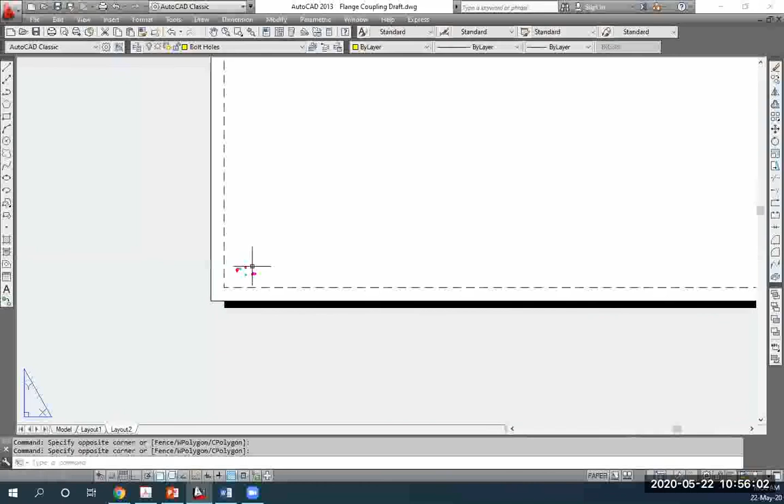The instructor explains you have to drag out the viewport and adjust it there. Sandeep confirms he understands: you go inside the viewport and change your scale there. The instructor thanks Sandeep for the discussion.

Another student asks a lab question about this week's orthographic projection exercise, where it was specified to use layers, but asks if they can also use the base command located on the top right of the menu table.

The instructor explains that when you use the base command, the top view, end view, and front view are all automatically generated, and the layers are also automatically shown, so that approach should be fine.